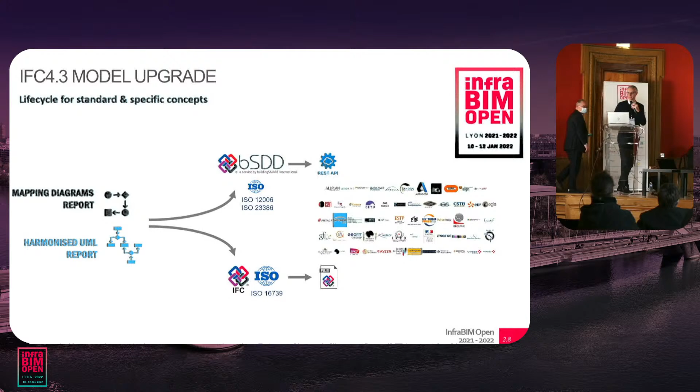Yes, thank you, Sylvain.

So in the next few minutes, I will present to you the French rail sector's contribution to the IFC rail implementation and open BIM development.

All the French sector partners have strong expectations of cost optimization in design, construction, operation and maintenance phases for complex and multi-domain projects.

The challenge was to bring together the technical experts and the domain business experts to use the IFC schema in real projects.

To do this, the French sector was involved in all the organization of IFC rail projects, from the PMO, Project Management Organization, to the other specific working groups, with more than 20 experts involved in over 200 meetings.

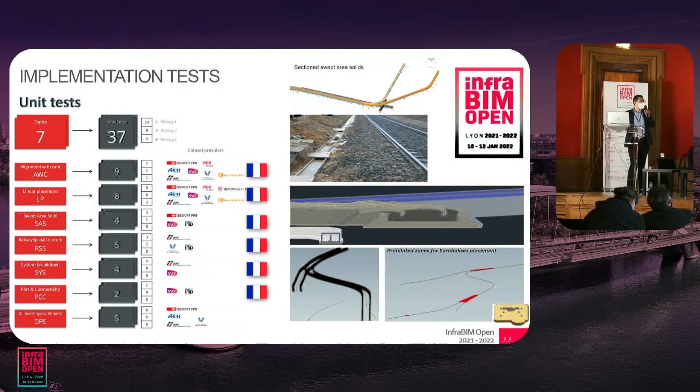But the key of the implementation test was the storyline. A storyline describes concrete railway projects in order to test all project configurations with a realistic data set. The purpose of the implementation test is to validate the export and import of data for the realistic project, and this is the fundamental purpose of open BIM.

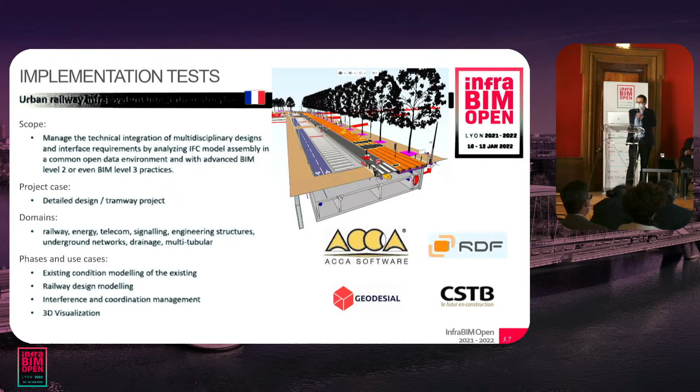It was one of the most complete storylines because many domains were involved, like railway, energy, telecom, signaling, etc. This storyline concretely tested 6 exchange scenarios, from a common spatial structure to spatial and mechanical interface, catenary, bridge structure, and etc.

And the last one, a storyline not yet finished, is the platform renewal storyline, which will be finished at the beginning of this year. We again took advantage of the contribution and coordination of the French sector, with a handover from SNCF to CETEC experts. I'll let the floor now to Vincent, who will present the next steps of IFC Rail implementation.

Thank you, Edouard. So this afternoon we are here to explain that we have contributed to providing a strategic standard for the open BIM process, that is IFC 4.3. We managed this, inside MINnD, with the stakeholders in Building Smart International. And we have delivered this, but we have to go on - we have to continue with the implementation process.

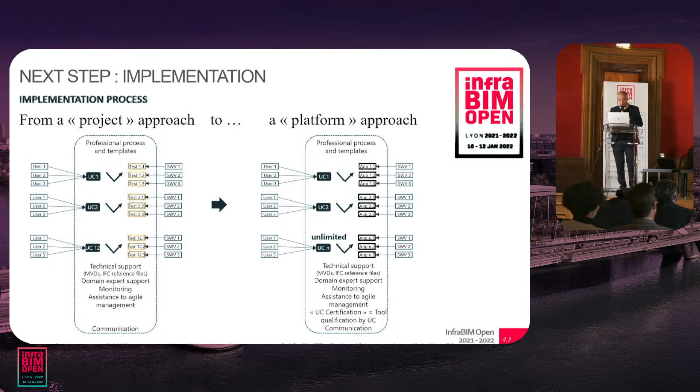What we have proved during phase 2 is that the software vendors get involved in the implementation of new use cases if and only if the representatives of end users, us, specify correctly and commonly their exchange requirements and modeling requirements, use case per use case, and if experts generate professional documentation on MVDs, use case per use case, and if the development can be supported by end users and IFC experts.

By the end, the implementation of use cases should be validated by a qualification process to be developed complementary to the BSI certification program.

What we have proposed to experiment in 2022 is an implementers platform. The implementers platform is actually a process where end users commonly push to the software vendors their implementation requirements, use case per use case, well documented, and where software vendors in this platform review them and have the opportunity to ask for details in order to decide to implement features in their software addressing each use case.

This platform allows each software vendor to ask for end user or IFC expert support, and then to provide evidence of the implementation in order to qualify their tool regarding each use case.

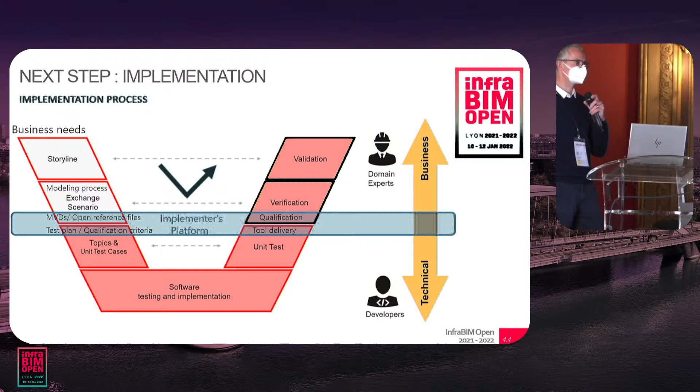Hello, I have a question about testing. So were you testing software, or are you testing the model's final results? For example, you have some information and you're checking it will be okay, or what was the testing for, unit tests I mean? Because usually in a test you have some code and you know what the results will be. You just program that part, and after that you receive whether it's okay or not. So what is it for? The testing, well, thank you for the question.

It's an interesting one. The testing was a multi-layer test, actually. You can almost see on the left the V cycle from the business requirements, the exchange requirements, listing the different business concepts to be exchanged. We derive several storylines, as explained, and then from those storylines, several unit tests, going deep, smaller and smaller bits of concepts to be exchanged. And once we have a small enough set of concepts to be tested, we created new 4.3 IFC files by hand, stating that this should be the result of this exchange for that specific set of concepts to be tested.

And then we provided those new IFC files to the software vendors, requesting them either to import or to export the same result as this reference file. We used the term reference file. And once the tools were able to do exactly the same that we did manually, we tested the import of small files coming from the other software tools to close the loop, to import and export the unit tests. And once those unit tests were working, we went up the V, gathering several unit tests and creating a storyline test. And then we validated the output thanks to the 3D viewers from the several vendors. So it was actually a multi-layer test principle.

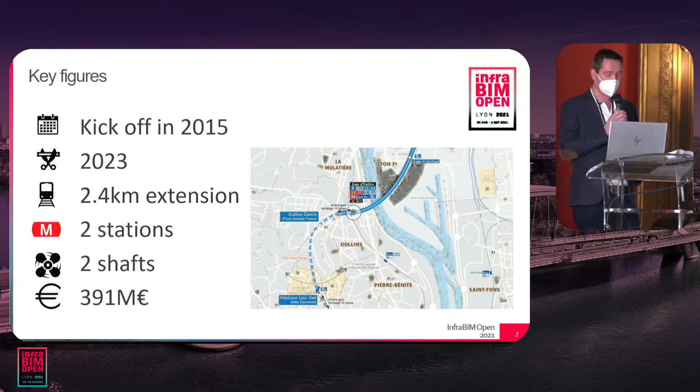The project consists of the extension of line B by 2.4 additional kilometers. The project began in 2015, and commissioning is expected in 2023. 2 new stations are created, Oullins Centre and Hôpitaux Lyon Sud, which is the terminus of the line and includes a 900-place parking. 2 shafts are also created, a ventilation shaft between the 2 stations, and a launching shaft with ventilation and an underground washing machine at Hôpitaux Lyon Sud. The overall budget of the project is 391 million euros.

Our client is Sytral, the public transport authority of the Lyon agglomeration. Egis is the team leader of a partnership composed of Egis, Systra, Atelier Schall, and AZC, in charge of project management and contract management, including site survey and technical synthesis. We decided to present this project because we based the BIM collaboration around open BIM formats, IFC and BCF. It's very interesting because it's a mix between punctual and linear infrastructures: by punctual I mean shaft and station, and by linear I mean alignment and track.

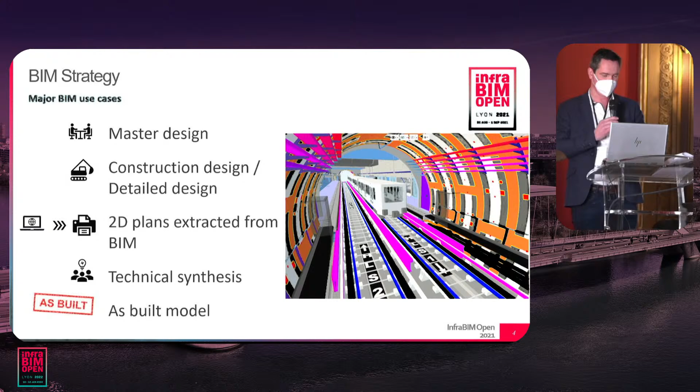We produced the master design in BIM. In 2018, we proposed to Sytral to implement BIM during the construction phase, and Sytral took up the challenge. The project has some advances in terms of BIM. For example, tunnel segments with the position of the drilling zone are modeled. We produce an as-built model during the construction phase. Train and pedestrian gauges are also modeled, and camera cones of vision and the visualization of camera views are also made in BIM. Pierre will present this item later. And now I will let Eric present the track work and linear systems. Thank you.

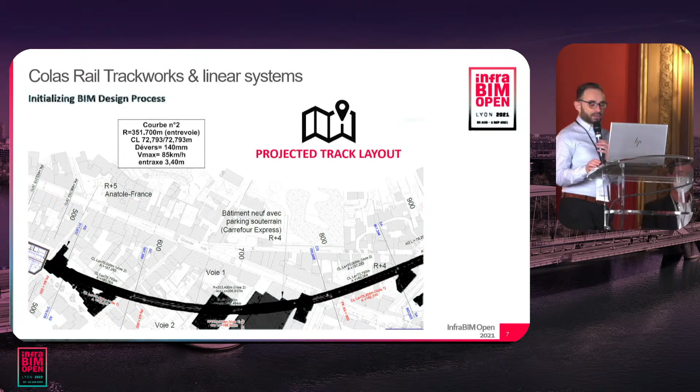How does it work for this project? We start with a BIM detailed design using several input data, such as the track layout. The project is from Egis, and then we have cross sections and profiles of the tunnel. This is the input. Then we do not post-modelize. We create the BIM detailed design directly, with the model in GeoRail.

GeoRail is software using OpenBIM IFC4, but in this project we are in IFC 2x3. We started the design in 2020. This software has the capacity to deal with rail engineering directly. GeoRail totally replaced the previous way of working. So then Colas Rail proceeds to the complete modelization.

We have in the scope of work one model for track work, other models for pedestrian walkways, cable trays, and fire ducts, all directly designed with the same OpenBIM software. Track detail design also means gauge analysis for both rolling stock and pedestrians. It allows us to check and prove the right alignment of a track in the tunnel.

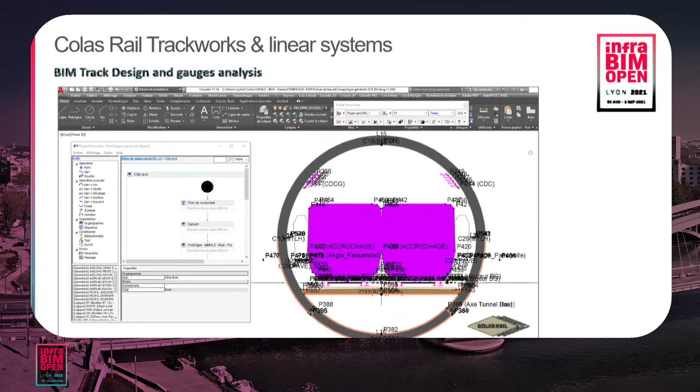These gauges are created with rules and then generated in 3D with GeoRail again. At design level, BIM track work experts analyze the 3D volumes of gauges for rolling stock and pedestrians. This is a view of a combination of different models. Each object's data is coordinated with requirements from maintenance and from site works managed by Egis. Colas Rail ensures digital continuity from design to site work.

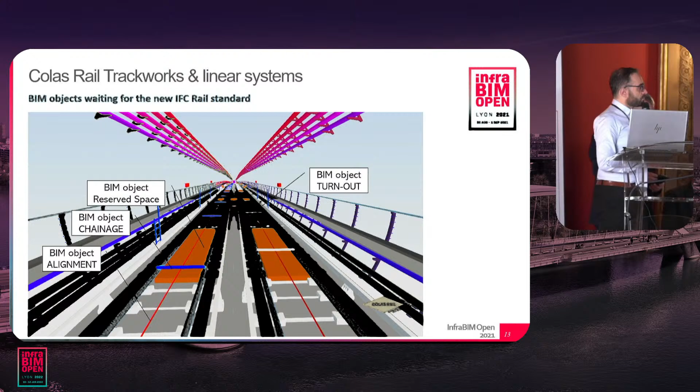We went ahead with BIM for railways on this project, as we were in 2020. We enriched BIM objects with data needed for linear projects, as IFC Rail was not published yet. Here we can see the BIM alignment, chainage, some reserved space for track turnouts, and the turnout objects. Finally, the drawings are created directly from the model in GeoRail for the site work that started in December last year.

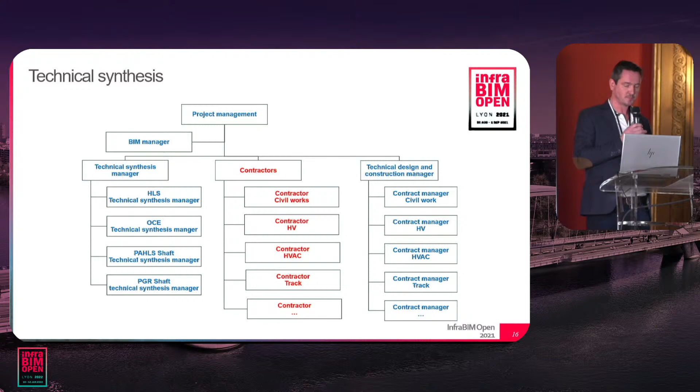I will present the technical synthesis. Technical synthesis depends on both project management and BIM management. It is complex because we have a lot of players. We have the technical synthesis team with a manager for each station or shaft. We have the contractors for civil works, power supply, high voltage, HVAC, etc. And we have a contract manager for each contract.

For a station or a shaft, to manage the technical synthesis, we bring together the technical synthesis manager, the contractors, and the contract manager. We have technical issues between contractors' models. Each contractor has his own contract, and we also have interface requirements between each contract. So we have to manage all these requirements during the technical synthesis.

We have a common data environment compliant with ISO 19650 that allows collaboration between all the players. We use the collaboration platform BIMSync, which works with IFC models, an open BIM format. So everyone can access the model using IFC, and we don't have editor issues or software incompatibility. We do clash detection on the IFC model with Solibri Model Checker, and we use BIMSync as a BCF server, so issues can be exchanged between Solibri and BIMSync automatically.

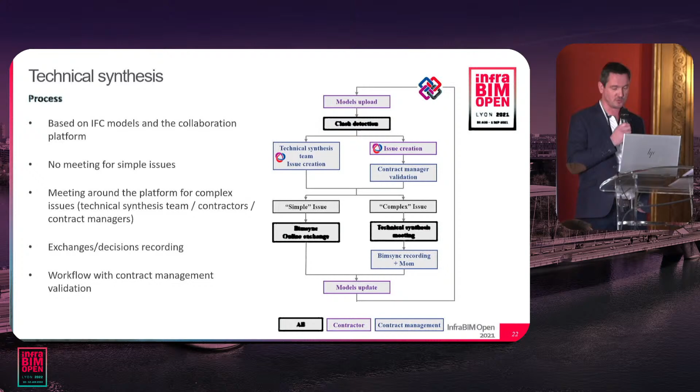These schemes explain the technical synthesis workflow. All the contractors upload their models on the platform. Once the models are shared, everyone can create an issue. For issues created by contractors, validation is required from a contract manager. Simple issues are managed directly on the platform. For complex issues, the synthesis team organizes a meeting with all the players. For simple and complex issues alike, the solution is recorded on the platform as a BCF.

Using BIM is very beneficial because there is no waste of time on reports and meeting minutes. It reduces the loss of time and money during the works phase. It requires two people full time for one year to manage the technical synthesis. We recommend keeping fewer than 200 issues open at the same time for a station or a shaft. With more issues, managing them is very difficult.

We can also note that with the implementation of a collaboration platform, there is no waste of time with emails, and there is no loss of information during the exchange.

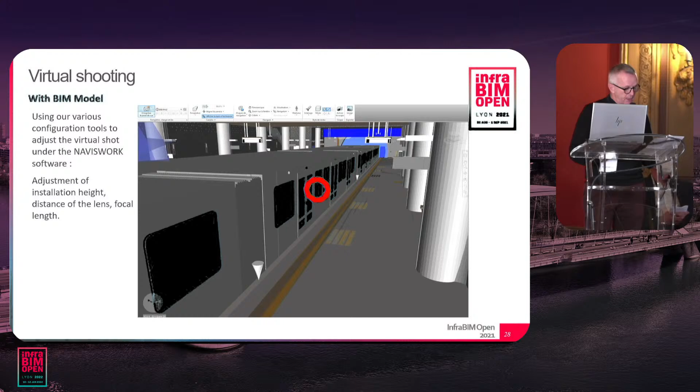The final setting allows us to optimize the control of the passenger interchange area. The framing is validated by the operator directly on the BIM model. In conclusion, the benefits are anticipation of building constraints, easier discussion with the operators before starting works, and adjusting the definition of supports.

We have a similar approach with other equipment, for example fire detectors, to respect the installation constraints and their maintenance conditions, such as accessibility to the equipment. We have created a constraint cone in the 3D model where no object can be fixed. This allows us to detect clashes with other trades.

As an opportunity with the BIM approach, we have studied the possibility of using an augmented reality headset to control all works during the building phase. Information about issues or clashes on construction sites can be directly imported into the BIM model via BCF.

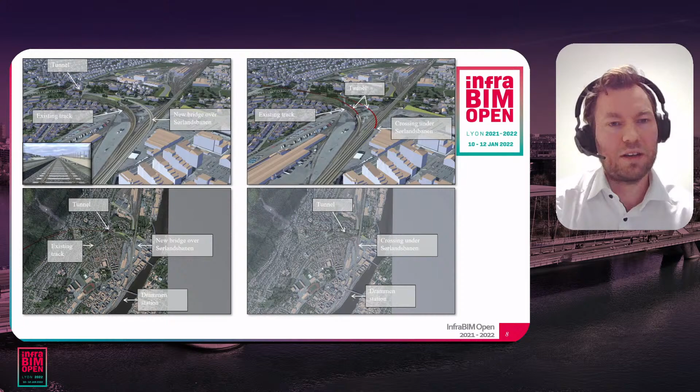And I have a project video from 2016, and it's really fun to look back at just old videos. And this is actually the same video that Dina showed earlier, and I think it's kind of laggy when we show it now virtually, but we can see that things have really happened with technology.

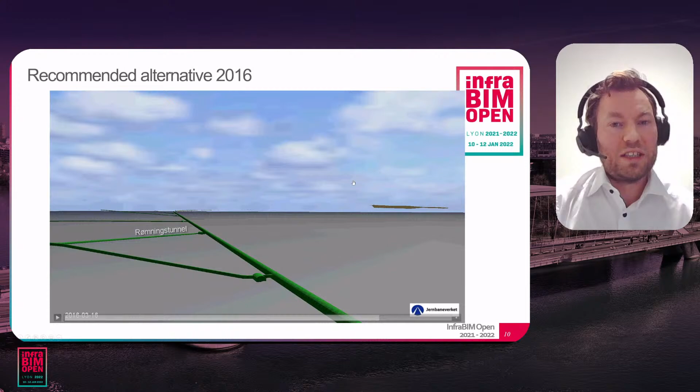And we then started with the detailing phase, and now I'm getting to my point, because we tried to model and illustrate all the different phases. We saw that the buildability, if that's a word, would be really challenging, and to build and maintain the train traffic at the same time is also a huge challenge. We had complex interfaces between contracts, and also this mix of design, build, and EPC contracts.

So to summarize the challenges: complex construction, several contracts, challenging interfaces, and after we worked with our site model, we saw that we had to have information on objects to have control. We couldn't just keep on having the information on layers in a DWG. And the last challenge we saw was the information loss.

When we were supposed to hand our work over to several contractors, we had been working with this project for 6 or almost 7 years. And the question was how we could transfer more of our knowledge to them.

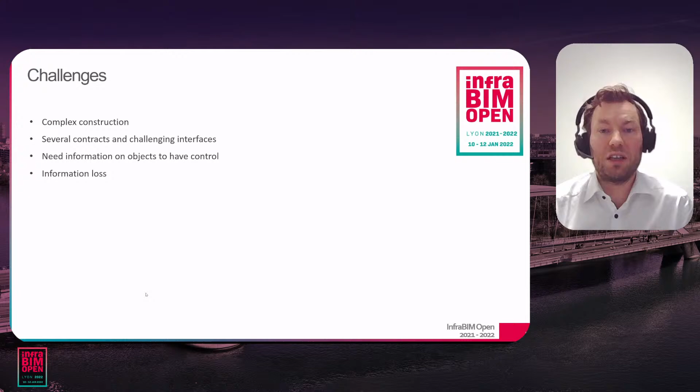And our solution was, of course, Open BIM. We decided that we had to get rid of DWGs and use IFC. We made a plan, or a BEP, a BIM execution plan. And we saw that we had to work a lot with change. And I will try to explain a bit more how we work with change. And Dina will talk about our BEP later.

To overcome challenges, we had to renew ourselves. We had to change our mindset and culture. We had several internal and external barriers, including skepticism around starting with something new. And of course, we had people that were asking why we should do anything new at all and not just wait for the industry standard to get ready. And of course, we had to work a lot with innovation.

And if you look at innovation, we like to define it as initiatives that are new. It has to create some sort of value, and it has to be implemented. It's not an innovation if we can't implement or scale it. And when we talk about implementation, we have to think about how different we are as humans. We have the enthusiasts and visionaries on one side, and they hate structure and they love the untested. And on the other side, we have people that love stability.

And this difference makes innovation difficult on a corporate level, because the scaling of the good initiatives gets stuck in the gap. But if you look at digital innovation, we can close the gap with technology. We can create new processes and automate things on a whole new level. And now we are able to talk about scalability and even how we can push the industry further.

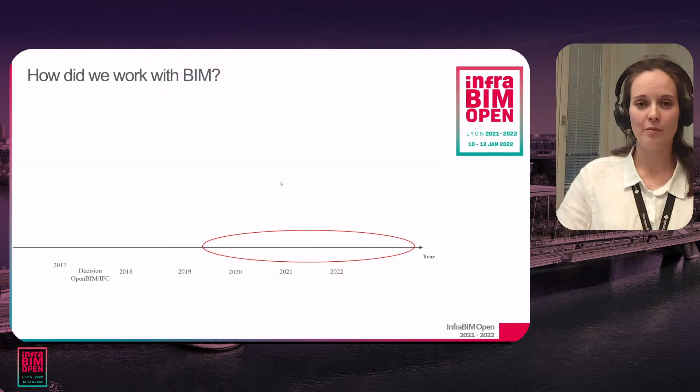We had to handle all the information found on drawings in our models, both geometry and text information. So in order to get all of this information, we had to standardize, using plugins and fixed setups so the programs talk the same language.

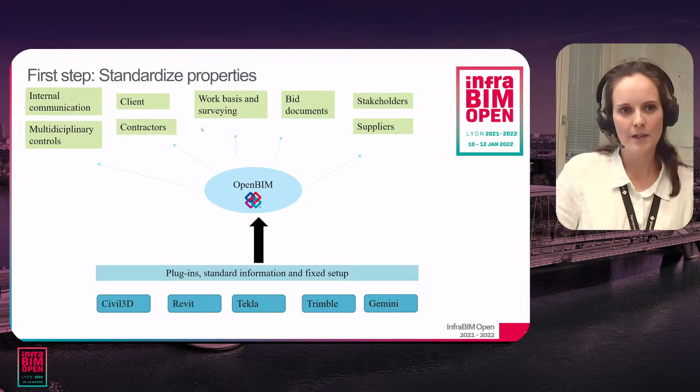So now I will show you our actual workflow and how we work with this project. The IFC files are in the center of everything we do. First, each discipline uses a suitable engineering tool like Revit or Civil 3D for their models. By using a plugin, easily shown here, we include information on the models, which among other things is used for production of the bid documents or specifications.

Further, we can see that the IFC files are also in use in a whole project view model, which ensures a common platform so that all project employees have the latest updates. And this model is, of course, also provided to the project owner, involving them in every process of the project.

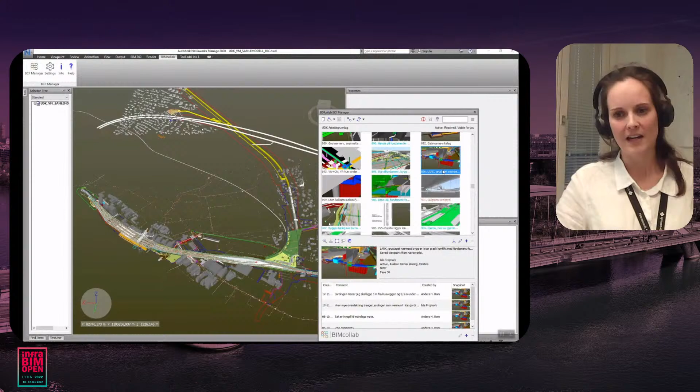Our project owner is also involved in the multidisciplinary control, where the same model again is in use. Here, potential collisions and conflicts are detected, and we use BCF files as exchange format. So today we have actually uncovered around 10,000 issues in the program we use, shown here, BIMcollab.

Another important use of the model is illustration and project videos. We have already shown you our video of the project, but we've also used it for sight-to-signal controls with train drivers, to see if we're actually building something that we can use.

Again, new ways of working in our organization requires changes in our clients' organizations. We saw that when models were our only delivery, our client needed to change both mindset, but also routine, software, hardware, and everything.

So now I have been thinking about this internal part, as you can see in the red circle, but we need to look up and see how it actually affects the bigger picture. We see that it requires changes from outside the project team or project owners. And when we change from drawing delivery to models, it requires changes in systems for receiving, reviewing, use, and archiving, and everything. So we claim that OpenBIM creates value.

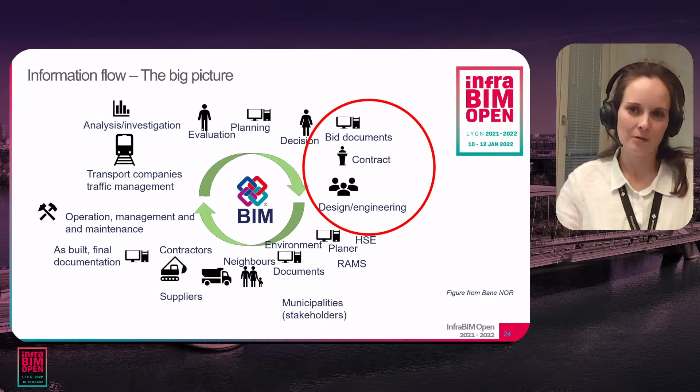Going from this to this, using OpenBIM, we can see that the picture is simplified. To illustrate, we'll take one example from one of the important sectors here. When we as engineers are working with the design phase of a project, meaning producing the actual work basis for the contractors, we obtain a lot of important knowledge. So, as Thomas said earlier, how do we transfer this knowledge to those who will actually perform the construction work?

One solution for closing this gap is using IFC and properties, where a lot of information is transferred and connected to the specific objects in the model.

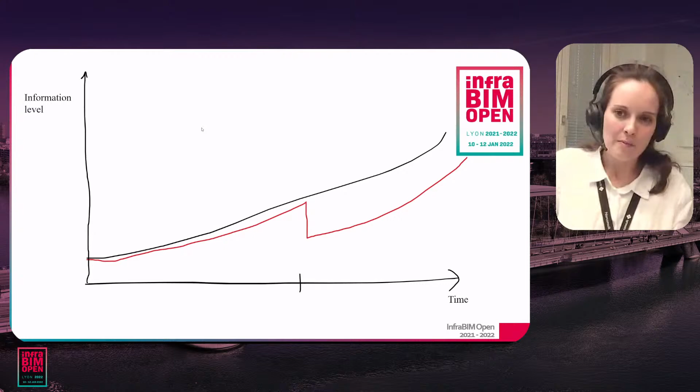Dina, just a moment. We don't see the screen anymore here. Just a few minutes, a few seconds, sorry. Just to make sure it appears again.

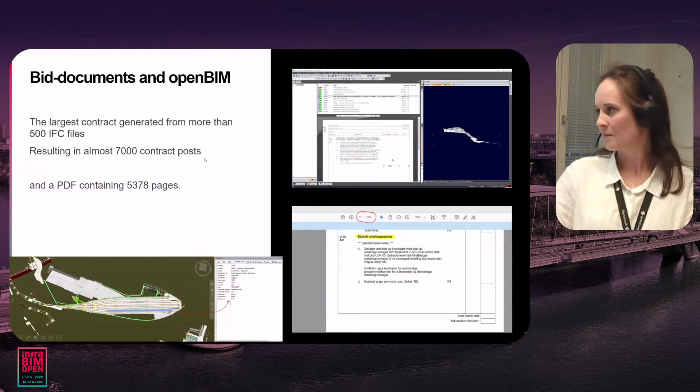Do you want to say something? If you just jump to the achievements slide, I could take that now and you can round off if you don't have time for more. I don't know.

Because of this, we think that everything we have done will give us a head start when the IFC standard is ready. We have established this culture of change and also a sharing culture, and we think that's really important for getting the organization ready for the future.

We're also seeing that innovation and collaboration are closely connected. We don't think we're able to do everything within our four walls, so we need new competence and close collaboration with clients, developers, even startups to meet what's coming. So our equation is: culture of change plus sharing culture plus innovation and collaboration. That's what makes us able to implement things and scale them. We think this equation is key for implementation when the IFC standard arrives. It's not only about software, it's a lot about how we are as humans as well.

Another thing we've seen is the importance of having high digital ambitions in projects that last many years. This graph shows how the development in the industry is going exponential. If we had locked the digitalization level when we started the detailing phase back in 2017-2018, we would have a huge gap when we're finished in 2025. Since we tried to do something new, we worked a lot with innovation in the first years, which is why our project is not outdated yet - it's a modern project. We're also seeing that the gap in digitalization level by 2025 should be much smaller.

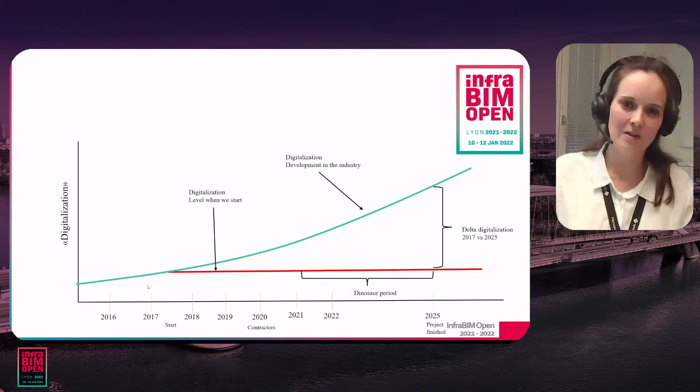Dina, are you online? Yes, but I've been sharing the presentation now. We have presented, but yeah. Okay, you didn't hear anything? Thanks. Yes, we can see that. But Thomas did present this now 2 minutes ago. Mm-hmm. You didn't hear it? No, we did hear it. Okay, let's continue. Good. Yeah, just show the video, and I think we're done. I think we presented something you didn't hear now in the last minutes, or? Yeah, I think the last slide was not presented yet. Yes. Which slide didn't you hear? Because I think some of those are online did hear the whole presentation, or? Yes, it's a bit difficult to know. Sorry that I interrupted. For those of us that are online, we actually saw already the achievements, actually as an answer to the question that was made in Lyon. So and then we talk.

Thomas spoke about how they have bridged the gap, and that because of the use of IFC, they have been able to have a project that is up to the newest standard, even though they started the project in 2017. Basically, they managed to keep the project current even though it started back then.

Mercedes, do you know if Jorge is online? Okay. Jorge is online. He should be. He told me that he will be online. He's following in streaming. Okay, So if you can just make sure that he's doing his presentation is not yet online. Do you have a video, Dina and Thomas, to present?

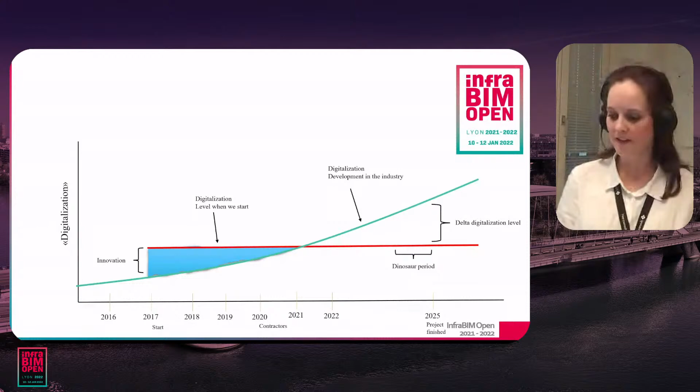We only started construction with the main contractors last year, so we don't have the big numbers yet. But what we can say is that the project is still on budget, and we do see that the number of change orders in the construction contract has a positive tendency - from the first pre-works we saw until now, there's been a decline in numbers, which is positive. Another important thing, as we've discussed, is the change in culture and mindset for our co-workers. We are pioneers in our company, and that has high value.

That's good that you're saying that about the change orders. I think if you look at the history of normal projects of this size, and you think about how many change orders there are and how long they historically take, it's a good way. So we're looking forward to seeing when the main contracts have become more realized and built. Good.

Jorge, are you online? Yeah, I'm online. Okay. Can you share your presentation, please, just to make sure it works? Because we had some difficulties, not from Dina, it's here. The problem is here, so we're trying to solve it every time. I think I'm sharing, Jorge, just a moment. Thanks Dina and Thomas for the presentation. Thank you. Thank you very much, Dina and Thomas.

Now Jorge will present the digitizing to improve railway line management.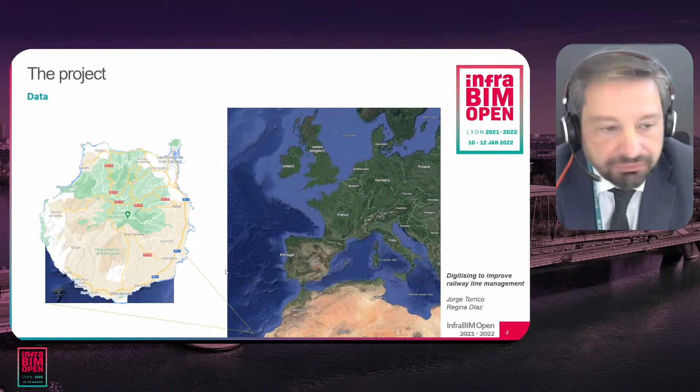It's in the Canary Islands, in the southwestern corner of Europe, and we are talking about 60 kilometers of railway line, a new railway line between the city of Las Palmas in the north part of the island, with a population of almost 400,000 people and 700,000 with the surrounding towns, connecting to the touristic area in the south and through the airport.

This is the infrastructure, 60 kilometers of railway line, with a focus especially on sustainability by minimizing the use of natural resources and promoting energy self-consumption, and innovation through creating a digital environment to manage all the works of the construction and further the maintenance and exploitation phase.

So this specific project is about digitizing documentation, because all the detailed design projects were done almost 6-7 years before. This is a long-term project, and we have the chance now to create this digital environment and transfer all the documents to it, creating a BIM strategy that I'm going to explain, in order to have in the future the digital twin of the line in the exploitation phase.

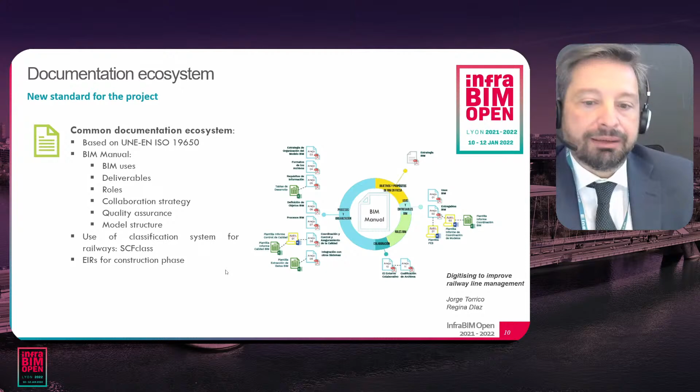And we thought that we need a classification system specific for railways, and we use this SCF class, a Spanish classification system focused on railways, because we have the lack in the development of the IFC format, because IFC 4.3 is not yet implemented in the software. So we had to use IFC 2x3 or 4, created for buildings, but use a complementary tool, this classification system, in order to have all the data well structured and identified, and providing as well documentation for the tender of the following phases.

So we have made reverse engineering, non-designing, only transforming information from CAD to BIM, and sometimes using some native formats in the proper software to create BIM models. And we realized that in a 60 kilometer infrastructure, we have to move forward from the BIM scale to a territory scale in a GIS tool. So we took all the detailed design, transformed it to BIM, integrated all of them in a huge BIM model, and transferred this huge BIM model to a GIS tool, creating a common database for all the data of the infrastructure.

I'm not going to stop more in this detail, but only for taking into account the size of the project: we are talking about more than 200 BIM models, considering that one station is only four IFC models. We have more than 100 models from the infrastructure: the section, alignment, earthworks, track, drainage, railway systems, and geotechnics with the terrain models with all the layers in order to take into account all the variables needed for the construction, and depots, contact line, windmill park, etc.

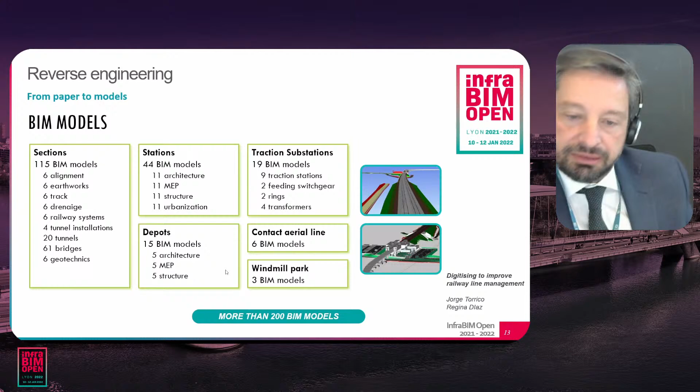We have some pictures from some of those models that were made with different kinds of tools. And this is a small portion of the integrated BIM model, but we realized that it was very, very difficult to manage such a huge BIM model. And we decided to go through an open BIM approach specifically for the multiplicity of agents. We are talking in this process of design, bid, and build, more than 20 contractors in the construction phase with all their supply chain.

So we have many agents acting at the same time, and we were worried about temporal interoperability using proprietary formats in a process that is for 5, 6, 10 years. So it's not a short-term activity, it's long-term. So we prefer to use IFC and keep this temporal interoperability in the whole process. We use IFC 2x3 and 4 for all the models, in all cases with only one exception, the structural reinforcement, that is going to be implemented only in the construction phase. And using as a support this classification system that allows us to identify every single element that must be classified.

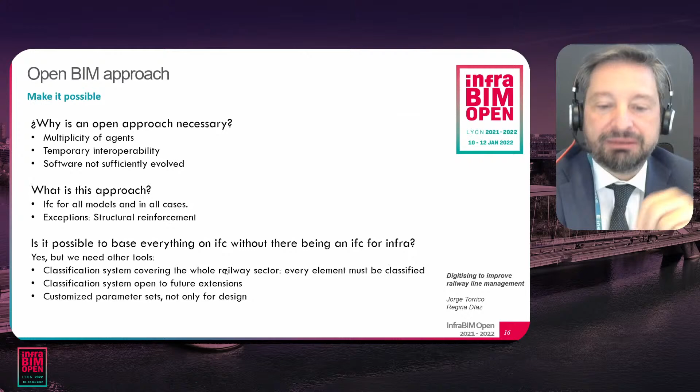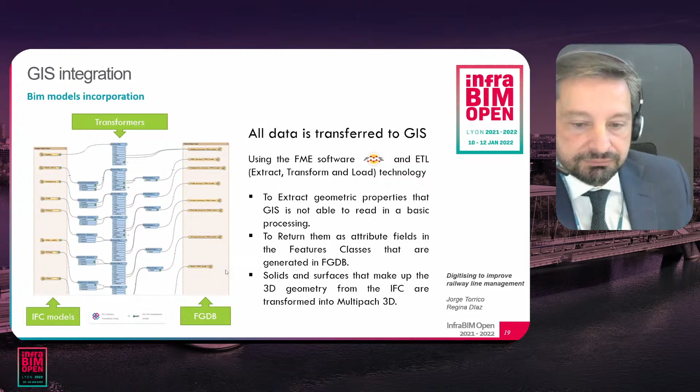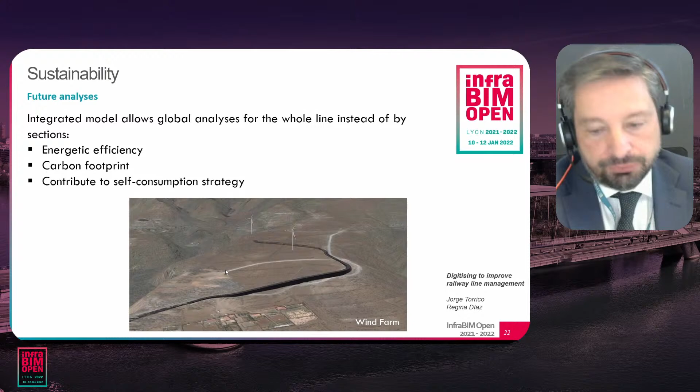we have the chance in this integration of the whole infrastructure to make more common analysis, specifically sustainability analysis about energetic efficiency, carbon footprint for the whole line, and establishing some variables related with those analyses in order to take decisions during the construction phase, and some modifications that we know are going to be in this phase, but having more variables to do this decision taking. So I'm finishing in conclusions.

All the information created in the detailed design phase transferred to a digital environment, homogenization and standardization for the entire infrastructure. We have to take into account that almost 20 different engineering and architecture companies were involved in this project, following the same rules but creating different documents. Easy to follow the construction, control the works, and create dashboards through business intelligence.

An additional quality check of the detailed design project using OpenBIM as enabler, and with future connection with the maintenance management system that is planned to develop a GIS inventory of the assets of the infrastructure, and some management systems like structure or others that are going to be prepared. This is a pioneering project in Spain. It's the first time that a 60 kilometer line is digitalized completely.

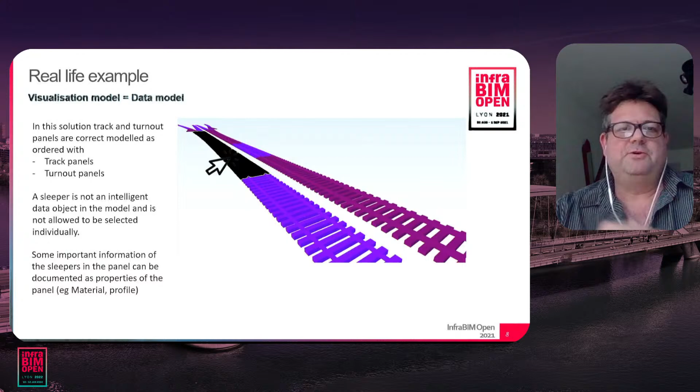So in this solution, track and turnout panels are correctly modeled as ordered, with track panel and turnout panel. It was highlighted here with colors so that you see it a little bit better. A sleeper here is not an intelligent data object in the model, and it's not allowed to be selected individually. It's not needed, it was not ordered, and it's too detailed. If we need some important information of the sleeper in the panel, then it can be documented with properties of the panel, for example the material, concrete or wood, or the profile. That's the goal, to really have the one-to-one approach from the model to the data model visualization. Yes, next one.

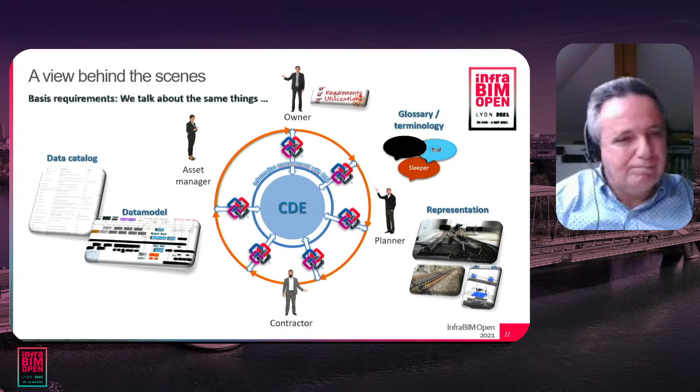So if we look a bit deeper into the CDE, what is the structure of such an object? Of course, we need the defined business objects, which are to be maintained in the BIM. And for each object, we have three main parts which have to be defined. Firstly, we have to define object identification. It's a unique object identification which permits to manage and to retrieve the object over the life cycle. The second thing is also very important. It's the spatial reference of the object, which permits us to position it in the real world. And the third thing is the temporal aspect, so the historization and the prediction of the data and properties of the object to be able to follow all the life of the object in time. And Mark will present now some details on that.

Thank you, Claude. You mentioned it, business view first. So we are working with business objects, with objects in the rail system, physical objects. Every one of you knows some of them. So at first there is a catalog with business objects to build and to prepare. They have process-related objects. Some objects are maybe needed only in one phase of the lifetime, and these objects carry the information about the specification and whatever. The objects have to be unique and with an international description. So that's the base that an exchange will work, especially that all these containers can be exchanged between the systems. Some of the properties are for identification, to guarantee the uniqueness of an object. Then it's a set of properties for all the different processes which this object will be needed in, and as well standardized for a proper data exchange.

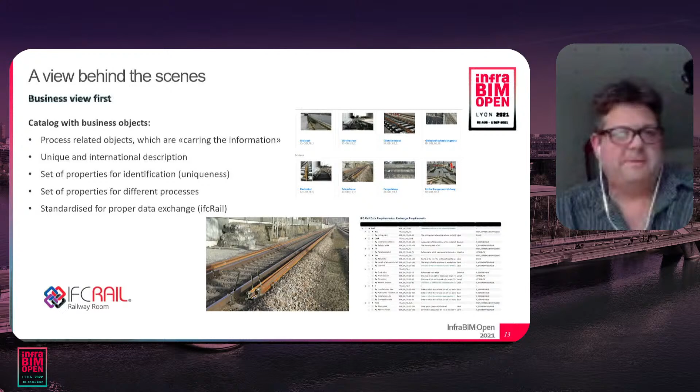Yeah. That's already Claude's slide. Thank you. Thank you, Mark. So we are switching to the localization and the positioning of the objects.

Yeah. Oh, slide. A bit better with the slide. Yeah, thank you.

We well know that for positioning we currently use geographical coordinates for positioning our buildings, and we also have the local positioning system inside the projects we use. But what is special for linear infrastructure is that we need something called a linear referencing system.

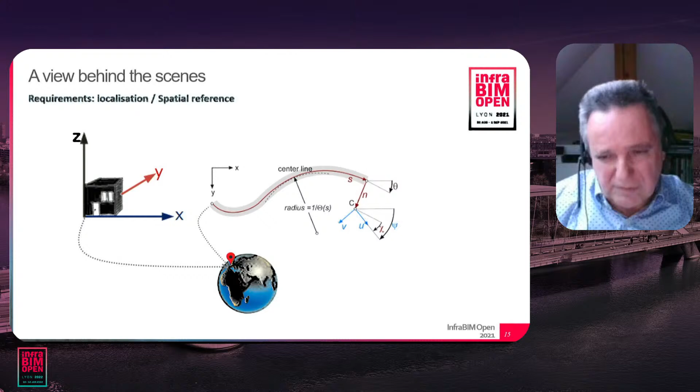A linear referencing system helps us position an object along a curve. This is a special additional thing in IFC 4.3, which was extensively tested last year, and will be a major extension of the IFC standard that will help us move infrastructure BIM forward very fast. Next slide please - here's an example of what is meant by a linear referencing system.

For railway, we have our alignment with cant, which is defined with three curves: a horizontal alignment, a vertical alignment, and a cant alignment. These three curves together combine to give us the linear referencing system, on which we can position the turnout panel, which is positioned linearly on the alignment.

Then there's a second thing - we have some objects which are linearly positioned inside the panel, so we need also a referencing system inside the turnout panel. This example shows the requirement of nested linear referencing systems, which are currently available in IFC 4.3.

Now for the historization we talked about - as a requirement, we need to record every change happening on the turnout panel during its life cycle. We have the first changes during the construction phase, from planning to commissioning, which are recorded with time aspects, and then during the operation phase all the activities like tamping, grinding blade, and replacing a frog.

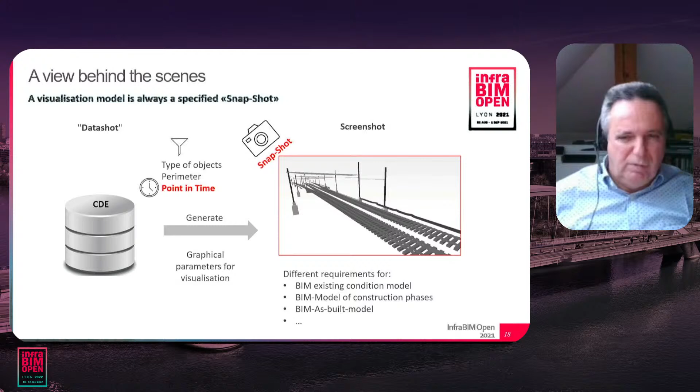Next - what is the impact on the application of BIM methodology? What we want to do is ensure sustainability in the future. Looking at the structure, we need this CDE with standardized structures, and the CDE will form the basis for data exchange across all processes, so we can avoid media breaks.

What's also important is that in the structure we use for data exchange, we use open and product-independent interfaces based on IFC. Of course, for identification of objects, we have to ensure uniqueness of the IDs, because in linear infrastructure we have large infrastructure networks, so we need to define identification conventions.

On the process side, we need to ensure mastering of the IDs for exchange between different systems, because we have a lot of spread data sets for that. For the spatial reference, we need distinct integration into global referencing systems. I heard in other sessions that GIS and BIM are very important, and that's exactly why we need this integration with the spatial reference.

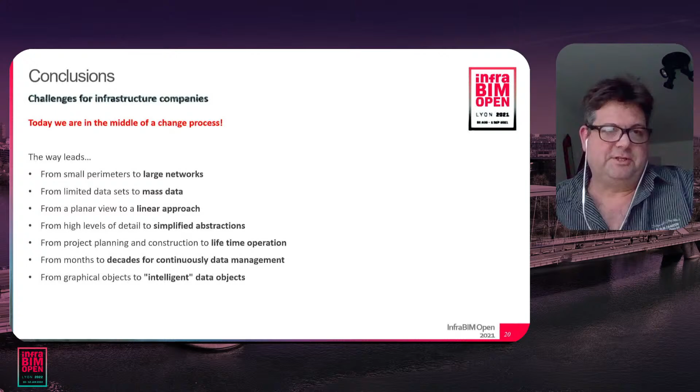A BIM project is only the birth phase. The long life follows afterwards.

A standard never fits to everyone, but only due to it does everything fit together. BIM models are already out of date after they have been designed, unless they are systematically updated.

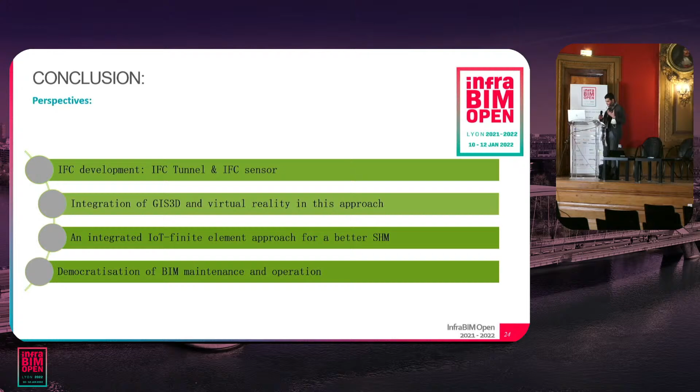Merci Noureddine. Timo, can you hear me? Yes, hello, Timo. Okay, thank you very much for a great presentation. Does anyone in the audience have questions now? There is one question. I will give it the mic. Wait.

I think it was slide 10. If you come back to slide number 10. Yeah, here. What do you mean by no support for SHM sensors in civil engineering?

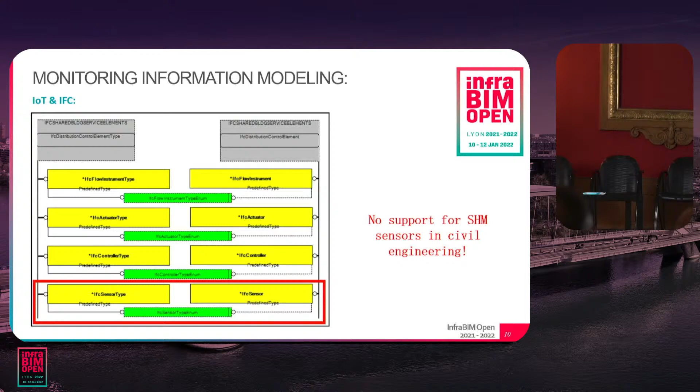So I mean that here in the IFC sensor type enumeration, we do not have an exhaustive list of the sensors that we have in our system. We have a temperature sensor, sensors in buildings, but in the case of our structure, we have a lot of sensors that don't figure here. So their properties, we can't export them in our model. That is why we put this remark, and it is an open discussion we can have with buildingSMART International to see if in their last version it is integrated or not.

I think, Timo? Yeah. You were talking French, even though you speak very good English. Timo, can I comment on the question regarding IFC 4.3? Yes, Karin, you can. Okay, thank you, Timo.

I'm really interested in all of these issues regarding the sensors and the lack of some of these concepts in IFC 4.3. I think the Infra Room would be really interested in looking at this, perhaps together with you, and also the ongoing European CEDAR initiative that both Timo and I are involved in. I think this would be really interesting. So Timo, if you can collect the contact details, maybe we can discuss this further. Okay. Yeah, I will take your contact details.

Any other questions? The IFC health monitoring project in the Infra Room, okay? Yes, I think an IFC health monitoring process would be very interesting, especially in COVID times. Okay, thank you very much for your great presentations.

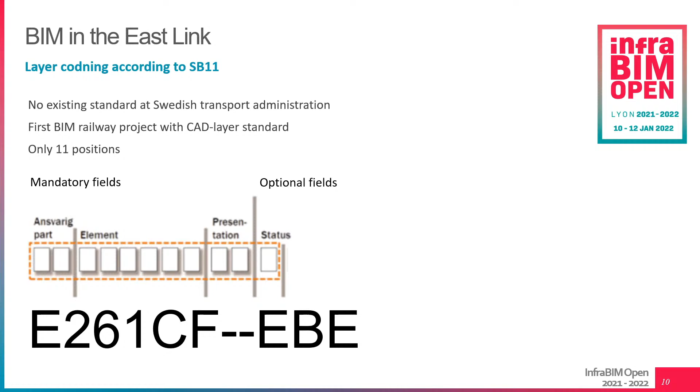Since there was no established way of working with models, we needed to establish even this in the project. Models are delivered from the designer to the project client. The designer presents the whole data delivery in some kind of meeting. A simple presentation of the coordination model is held, views and model products are presented, and finally, the review of the model per technical field is presented as well.

I'm going to be talking about the cooperation within the new mainlines. The background to this work is that the existing requirements were very poor and inexplicit. This was of course opening for different interpretations and frustration at both sides, both at contractors and at consultants. So our goal with the BIM requirements for the Eastlink and the new mainlines was to make a complete set of BIM requirements which are easy to understand. It was also very important that the requirements are clear and that there is only one way to interpret them.

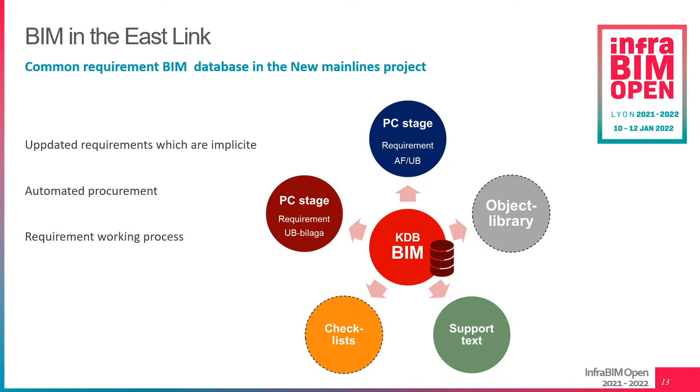And we have also created a requirement working process. In this animation we show implementation of the requirement, but from a different point of view. This time we show that if you use the same requirement database, it is possible to use it, for example, for the whole Swedish Transport Administration with just small adjustments for the projects who need it. The database also helps the different projects that use it to have control over requirement changes both within the projects but also compared to the main database. And you can also have project-specific procurement depending on the contract. This also means that in the delivery stage, every project has full control over applied BIM requirements, even if they have changed throughout the project's life cycle. My colleague Janne Perret was project leader for the requirement database.

And finally, in this last picture, I would like to show you why we did all this work with BIM and digitalization both in the Eastlink and the new mainlines, and what is the main and ultimate goal. It is of course the challenge of delivering the data from production to the different maintenance systems. And I think that this is not only specific to the Swedish Transport Administration. I think a lot of other countries know this problem. It is very important to work with a coordinated information structure, as we already do now in the Eastlink project. But we are not, of course, done.

I'm Christophe Phanouvong, working for Arcadis. I will present you today the new project of Toulouse Metro line, the third line, and we'll focus especially on the southeast sector, which I am the BIM manager for.

We'll begin with a general presentation of the project and explain what it consists of. After that, we'll present the different BIM processes we used in the first design development phase, phases 1 and 2. We'll also talk about the last phase, the construction document phase, where I couldn't show a lot of images, but I will try to explain what we did.

The city of Toulouse, for people who don't know, is the European capital of aeronautic and space industry. It's the fourth largest city in France by population ranking, and a city that attracts a lot of people for now.

It already has a good transportation network, with 2 metro lines, 2 tram lines, and an important bus network. But it has reached its limit with so many people coming into the city, so it became essential to link the northwest part of the city, where the Airbus company works, and the southeast part.

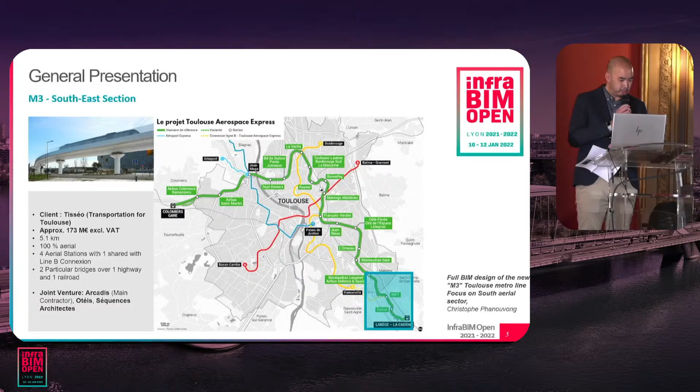The Line B connection is the project that connects line B to the new metro station.

As with many projects, this one has known different phases. Since June 2019, we began the first design development phase, and we worked on the second design development phase from June 2020 to March 2021, which I will focus on later. Since 2020, the rail system designer Alstom has been nominated and worked with us on the last phase, the construction document phase. Construction will normally begin at the end of 2022, finishing the civil part in 2026, with service launching normally in 2028.

With so many different actors on the project, and with open BIM norms just beginning in infrastructure, it was very important to establish BIM collaboration at level 2, well thought out from the beginning to avoid problems later. So we have three main principles on the project: organization, communication, and interoperability.

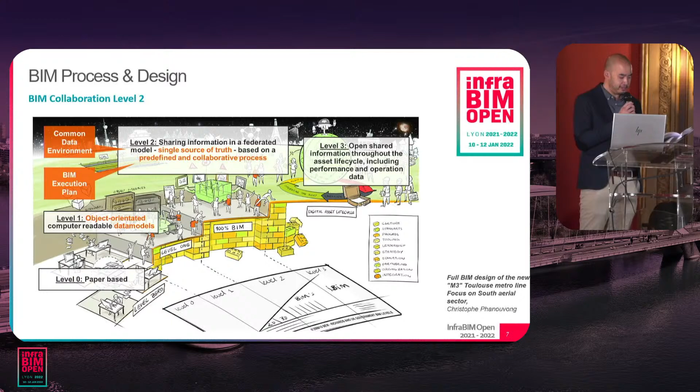Concerning organization, with the new project in the digital transformation era, we need to have a new objective, and this is why we need innovative processes. The Tisséo Collectivités and Tisséo Ingénierie, our client, made the implementation of BIM one of their priorities on the project, and this is why they have been assisted by a BIM supervisor since the beginning of the project.

Since the tender phase, they made a BIM specification book that asked all participants of the project to respect open BIM norms and IFC format for all exchanges and deliveries. For maintenance later on the project, and for the city to maintain the entire network using IFC, it was very important to be surrounded by this BIM supervision unit.

Which has missions to lead the general BIM coordination, to uniformize the different levels of detail and BIM deliveries between all the different actors, and to create the general BIM models and breakdown structures, authoring and updating BIM details on the specification book, and verifying the conformity to the BIM client specifications from all the deliveries.

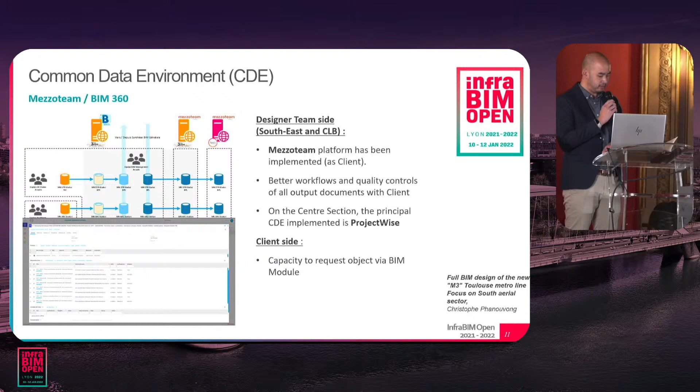The interoperability given by the IFC format has helped us face many challenges that we had to uniformize and coordinate production within different teams, three on the project scale, three or four different architecture firms, five engineering firms, and we work with a very mixed environment in BIM, because different software has been used during the project with all the different actors.

Depending on the different type of asset that we have to model, we use Autodesk Revit, SOFiSTiK Bridge Modeler, and we also use ArchiCAD, Civil 3D, and GeoMedia Covadis. This is not on the schematic view, but we also use Bentley OpenRail for the more recent phase.

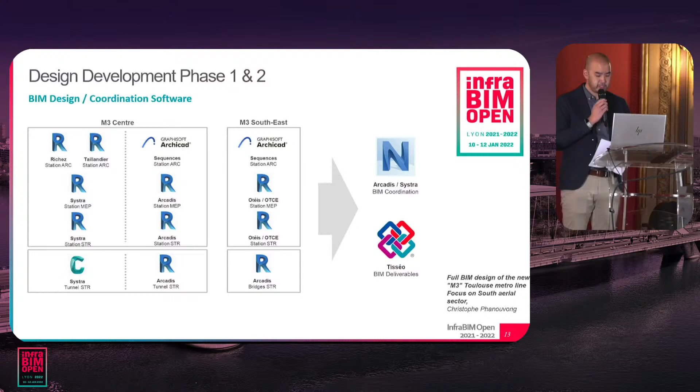We use the SOFiSTiK Bridge Modeler software, which is a plugin on Revit, to model the different bridges that we have on the project. We have already made a lot of BIM projects with bridges before at Arcadis, but it takes a lot of time before using this software.

So we had to find something more dynamic for a project, and this is why we found SOFiSTiK Bridge Modeler, because we already use Revit as software for modeling all the different projects that we have, and SOFiSTiK Bridge Modeler as a plugin uses Revit, uses all the main components of Revit for 2D plans, for example, or also for database management. This is why we have succeeded in implementing all the different information that we want on the project.

And this has permitted us to have something more dynamic. We could have an alignment on the project. This is not a fixed geometry. So with the alignment, we can have different elements attached to it, and this alignment could be updated, and all the different elements could be updated with the alignment.

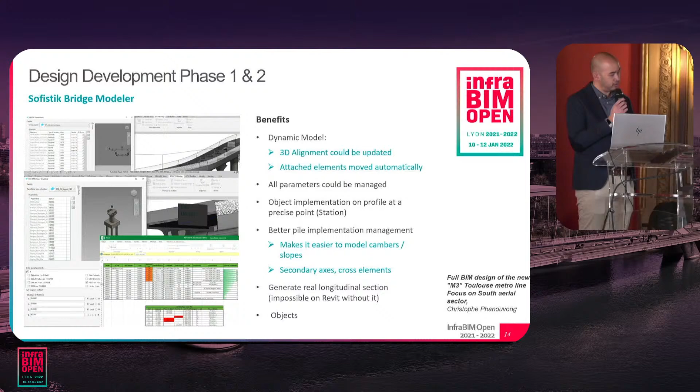But it's not something magical. The bridge modeler will not model everything for us. We need some experience. We need to know the state of the art on how to make bridges before using the software, and we have to set up every element to have something usable and something that could be updated very, very quickly.

If we talk about updating, it could take up to one hour to update just one model if you update something in the alignment, for example. So we have to manage everything before, to have something very efficient.

So the challenge for the next phase, for the actual phase, for now, for the construction document phase, is to raise the level of detail and to output with precision the different material distribution on some particular bridges on the project. We also want more 2D plans that come directly from the models, because for now, for all the detailed elements that we have on the model, we have to use traditional CAD software to put more details on some plans.

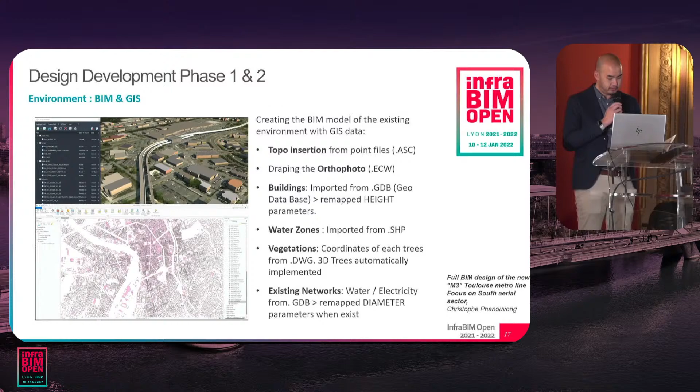So after different experimentation, we found a workflow, and we use InfraWorks to compile the different elements of topography, orthophoto, different buildings, all the different water zones and vegetation, and all the environment in our production software in Revit, so we could have all this through InfraWorks.

For the environment in IFC format, they are generated by the topography and the orthophoto that we put in Civil 3D there, and export that to IFC, and then export that to the client delivery, with all the different attributes that we have on the project.

As I said at the beginning of the presentation, we are now in the construction document phase. I can't show you a lot of different pictures of that, but we have a lot of different feedback from the preceding phases. We have increased the level of details. We have reinforced all the different technical coordination, and we found a better way to have collaboration.

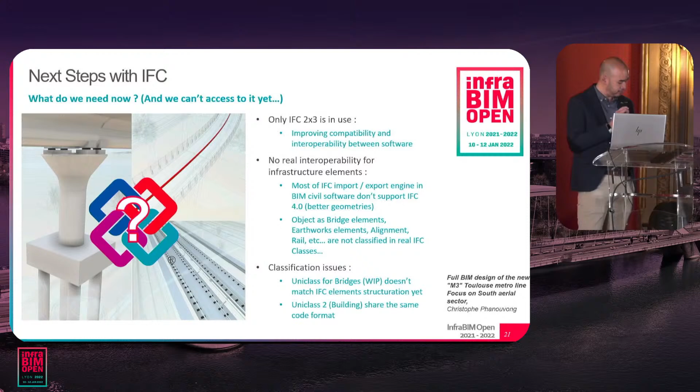Also, I think for everybody, we want to have some real IFC classes for infrastructure elements like bridges, geotechnics, alignment, rail, etc. But it is not possible with the 2x3 format. So we wait for 4.3. We want to have it as soon as possible.

We also see some classification problems with Uniclass for bridges, for example, because the client wants us to structure everything in the model with Uniclass, for using it for the maintenance phase and maybe for his future digital twin. But for now, it's still difficult because everything is work in progress. And for example, we found we can't match the different IFC classes with any format, so we have made some

compromises on the project. We noticed also that Uniclass 2 and Uniclass for bridges share the same codes. So, for example, an element in the building has the same code as in the bridges, which can make it difficult to have a good structure for the project, because we also have some buildings like stations, above-ground stations, and they share the same classification. So it's still difficult.